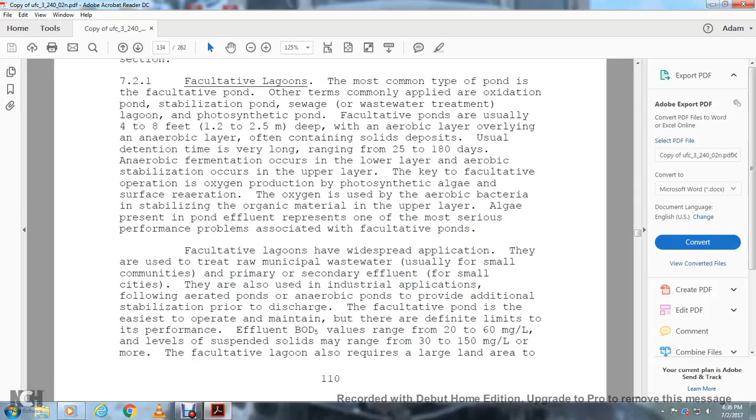Facultative lagoons require large land areas to maintain the BOD loading in a suitable range for this lagoon. Typical allowable organic loadings are generally much higher in summer than in winter, an advantage in areas where seasonal food processing wastes are received during the summer. Total containment ponds and controlled discharge ponds are forms of facultative lagoons. Total containment ponds are applicable in climates where evaporative loss exceeds rainfall. Controlled discharge ponds have long hydraulic detention times, with effluent discharged once or twice per year when effluent quality is satisfactory.

Alright, aerated lagoons. In an aerated lagoon, oxygen is supplied mainly through mechanical or diffused air aeration rather than through photosynthesis and surface reaeration. Many aerated ponds have evolved from overloaded facultative ponds that required aerator installation to increase the oxygenation capacity. Aerated lagoons are generally 6 to 20 feet deep with detention times of 7 to 20 days. The chief advantage of aerated ponds compared to facultative lagoons is that they require less land area. Aerated ponds are used in both municipal and industrial wastewater treatment applications.

For municipal waste, aerated ponds are restored when the facultative system becomes overloaded. Minimum land is available for expansion for industrial waste. They are sometimes used as a pre-treatment system before discharging to a municipal sewage system. Both municipal and industrial applications of aerated ponds may be followed by facultative ponds.

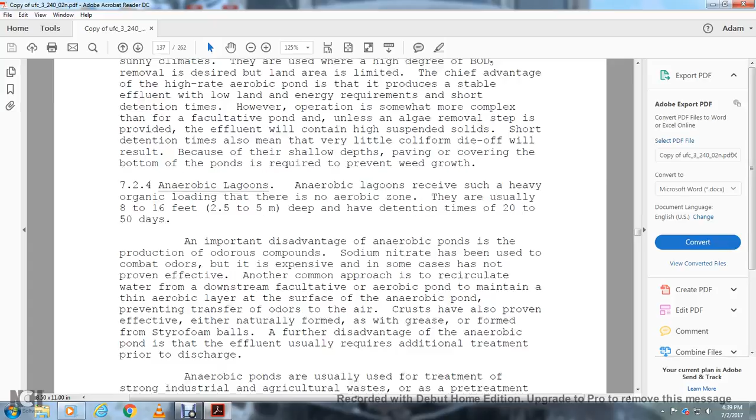7.2.4 Anaerobic lagoons. Anaerobic lagoons receive heavy organic loading, so there is no aerobic zone. They are usually 8 to 16 feet deep and have a detention time of 20 to 50 days. An important disadvantage of anaerobic ponds is the production of odorous compounds. Sodium nitrate has been used to combat odors, but it is expensive and in some cases has proven ineffective. Another common approach is recirculating water from a downstream facultative or aerobic pond to maintain an aerobic layer at the surface of the anaerobic pond.

Covers preventing transfer of odors to the air have also proven effective, whether naturally formed grease covers or styrofoam balls. A further disadvantage of the anaerobic pond is that its effluent usually requires additional treatment prior to discharge. Anaerobic ponds are usually used for treatment of strong industrial or agricultural waste, or as a pre-treatment step where an industry is a significant contributor to municipal waste, because they do not have wide application for treating municipal wastewaters. Anaerobic lagoons are not discussed further in this manual.

Section 7.3 Facultative lagoon design. Facultative lagoons shall be strongly considered for those installations that have no significant industrial wastewater component and that have available land area. This lagoon type is simple to operate, stable to flow and load variations, and has low capital and low operating costs.

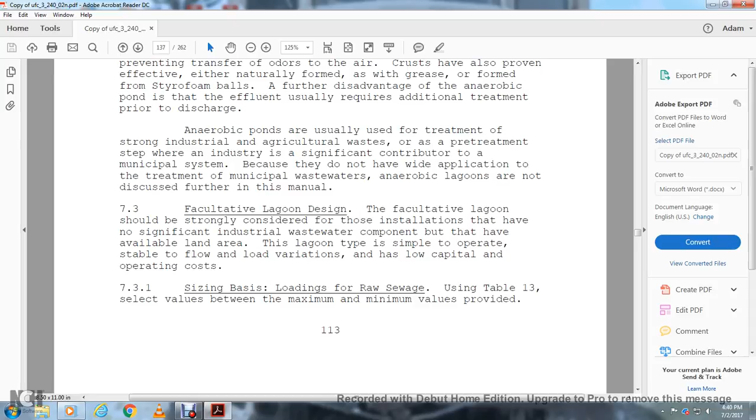7.3.1 Sizing based on loading of the raw sewage. Use Table 13 to select values between the maximum and minimum values provided, depending on the severity of freezing, ice cover, and available sunshine. Check the lagoon type for the detention time listed. Facility layout: with multiple ponds in series or parallel, limit the first stage pond to 40 pounds per day per acre, or kilograms per day per hectare, for odor control.

In areas where the average winter air temperature is 30 degrees Fahrenheit or less, and areas where the average winter air temperature is 50 degrees Fahrenheit or greater, per cell, a series of cells may be loaded as high as 90 pounds per day per acre. Portion the remainder of the total required area based on BOD loading equally among the remaining cells. Table 13, facultative lagoon sizing criteria.

Climate cold, extended ice cover: minimum 15 to 20 pounds BOD per day per acre, detention 150 to 180 days. Temperate: loading 20 pounds per day per acre, 50 pounds per day maximum, detention 40 to 150 days. Subtropical or tropical, no ice cover: 50 to 100 minimum BOD loading in pounds per day per acre, detention 10 to 40 days.

Depth: provide an operating depth of 6 feet, allowing the depth to vary between 3 and 8 feet for load variations and for insect and weed control. The ponds will also slowly accumulate solids over time. Convenient access should be provided so that equipment can dredge the pond. This normally is not required more frequently than every 10 years. For the design equation, refer to EPA 625-183-015 for a discussion of applicable rational design equations.

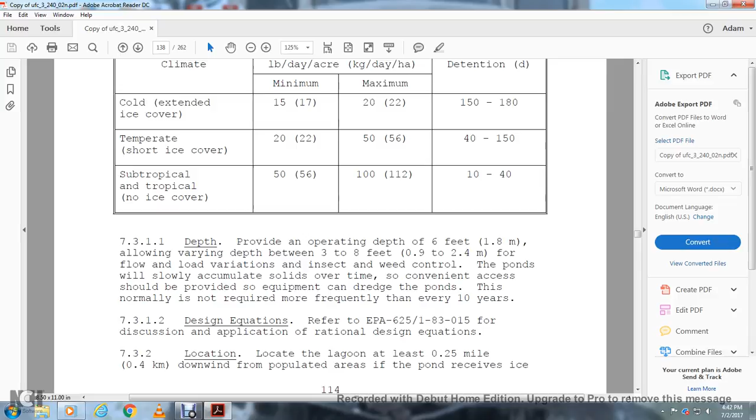Location: the lagoon should be at least a quarter mile downwind of populated areas. If the pond receives ice cover through the winter, a greater distance is recommended if possible. Exposure: choose a site providing maximum sun and wind exposure. Inlets and outlets: for circular and square lagoons, the inlet should be near the center. For rectangular lagoons, place the inlet one third of the distance from the influent end and locate the outlet so short circuiting is minimized. Provide an outlet capable of drawing off at multiple depths. Construction.

Provide levees with a minimum top width of 6 to 8 feet and interior and exterior slope ratios of 2 to 1 to 6 to 1. Provide a natural impervious soil liner, bentonite clay, which is required to minimize the exfiltration to groundwater. Using synthetic material lining will probably make the treatment process uneconomical. May be required by local regulations.

See Figure 22 for the details about facultative lagoons. Refer to paragraph 7.7 for the lagoon sealing requirements. 7.3.6 Layout. Use square, rectangular, or circular lagoons at small installations. Single lagoons are acceptable. Multiple lagoons at large installations are arranged for series or parallel operation. See Figure 23 for alternative lagoon flow schematics.

Recirculation can be used to increase the operational flexibility and treatment efficiency. Recirculation returns the active algae cells, increases oxygenation capacity, and dilutes the influent biochemical oxygen demand load. The recirculation ratio should be less than or equal to 2.

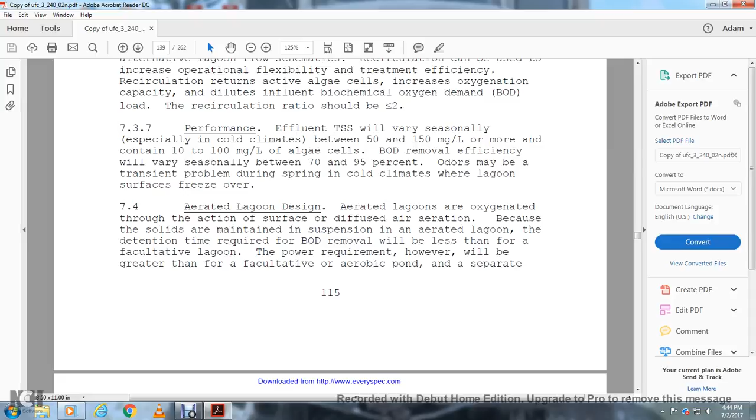7.4 Aerated lagoons. The aerated lagoon uses mechanical surface or diffused aeration, and the solids are maintained in suspension in the aerated lagoon. The detention time required for biochemical oxygen demand removal will be less than that of a facultative lagoon. The power requirement, however, will be greater than the facultative pond, and separate settling ponds after the aerated lagoon are usually provided to remove the suspended solids.

The aerated lagoon is operated as a complete mix, mechanically stirred, no recycle system. Compared with an activated sludge system, aerated lagoons may have a lower capital and operating cost and greater ease of operation. Therefore, aerated lagoons should be strongly considered for use at installations where adequate land area is available and discharge limits are not restrictive.

7.4.1 Size of basins. Number of equal size basins: provide at least 2 hydraulically separated aerated basins, and a third basin for solid-liquid separation. Aerated basins should be designed to operate with either a series or parallel flow pattern.

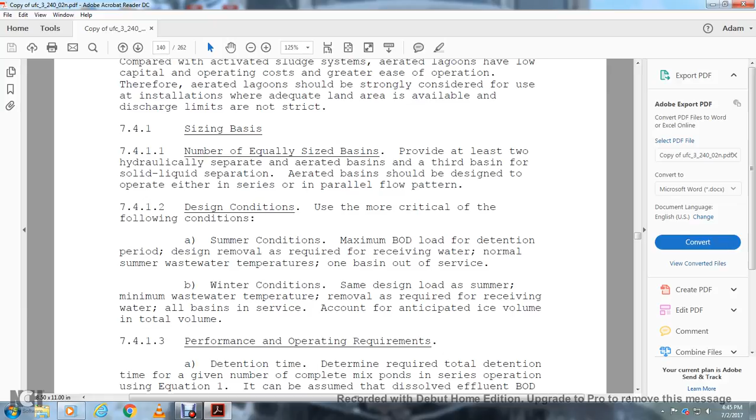7.4.1.2 Design conditions. Use the more critical of the following conditions. Summer conditions: design biochemical oxygen demand load and detention period, removal required for the receiving water, normal summer wastewater temperatures, one basin out of service. Winter conditions: same design load as the summer, minimum wastewater temperature, removal required for the receiving water, all basins in service, accounting for anticipated ice volume in the total volume.

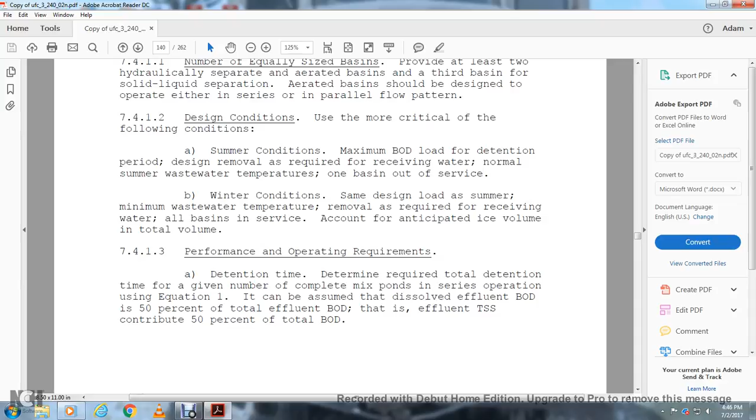Performance and operating requirements. Detention time. Detention required for the total detention time, given the number of complete mixed ponds in series operation, equation 1 can be used to determine the effluent dissolved biochemical oxygen demand, 50% of the total effluent biochemical oxygen demand, given that effluent TSS contributes 50% of the total biochemical oxygen demand.

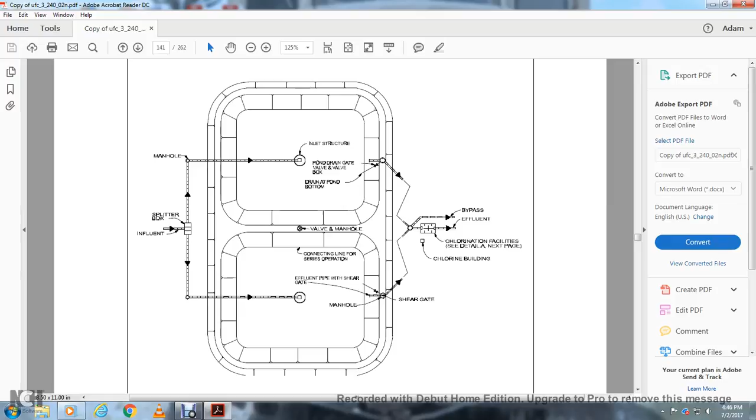Alright, facultative lagoon, mechanically aerated operation. A manhole. You have your valve of the manhole connecting line for parallel operation, influent splitter box manhole, inlet structure, valve of the manhole connecting line for series operation, drain at the pond bottom, bypass, effluent, chlorination facilities, chlorine building, shear gate, effluent pipe with a shear gate.

This is continued. You have the Parshall flume, effluent, chlorine contact tank, bypass shear gate, effluent shear gate, flush connection, lagoon drain, valve, manhole, normal lagoon outlet, inlet structure, inlet pond pipe, bottom of the pond, pipe support, minimum depth, outside diameter, maximum depth, outside area, influent, concrete splash block.

Typical section A, embankment, freeboard of 18 inches minimum, liquid depth 5 foot, minimum liquid depth 2 foot, embankment top width of 2.4 meters, seeding extending on the outside to 2 feet above the maximum waterline, embankment, max slope, and the fences.

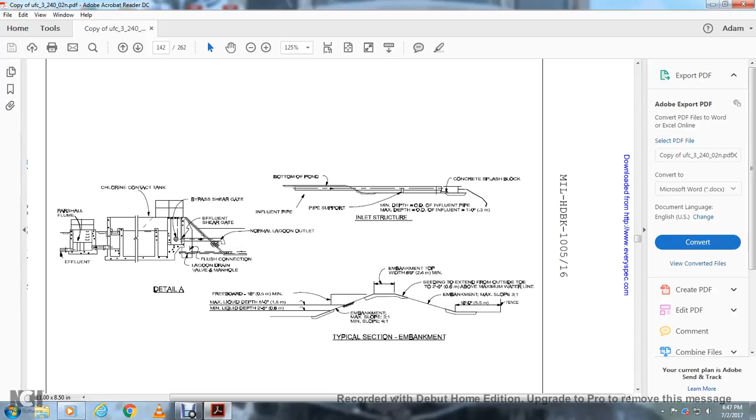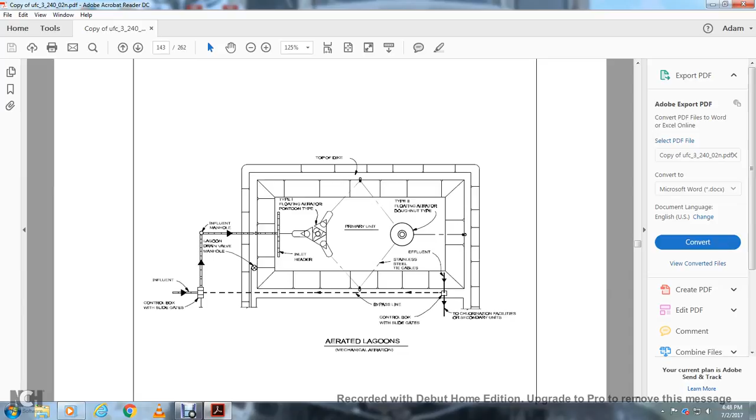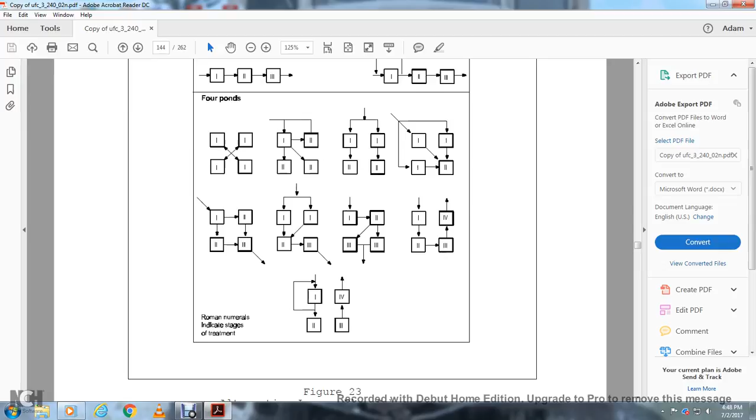Alright, aerated lagoons. Top of the dike, primary unit, type 1 floating aerator pontoon type, type 2 floating aerator donut type, effluent, inlet header, stainless steel cables, bypass, control box, slide gate, chlorination facility, secondary units, influent manhole, lagoon drain valve, manhole, inlet header, influent control slide gates. 2 ponds, 3 ponds, 4 ponds, alternative lagoon flow schematic.

Alright, equation: T, total hydraulic detention time divided equally among the number of aerated basins, is equal to N, the number of aerated basins operated in series, divided by KT, the first order reaction rate at the operating lagoon temperature, times the influent total biochemical oxygen demand in milligrams per liter divided by the effluent dissolved biochemical oxygen demand, to the 1 over nth,

minus 1. Alright, determine the rate constant with data for actual similar wastewater and operating conditions; if not practical, use a K of 2.5 per day for normal domestic wastewater at 20 degrees Celsius. Adjust K20 to the expected operational lagoon temperature using equations 2 and 3.

Increase the number of ponds in series to decrease the required total detention time. Lagoon temperature. Lagoon temperature is affected by the influent wastewater and ambient air temperature, basin geometry, and mixing condition. The equilibrium temperature can be approximated with equation 2.

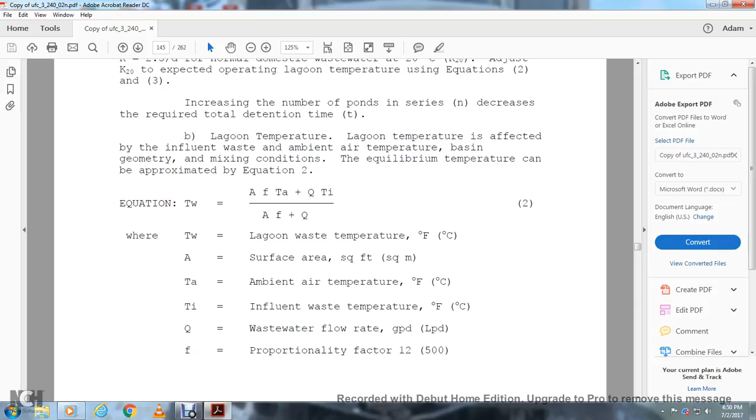Lagoon wastewater temperature is equal to the area of surface, square feet, times proportional factor 12 times ambient air temperature, plus the wastewater flow rate, gallons per day, times influent wastewater temperature, divided by area of surface, square feet, times proportional factor 12, plus wastewater flow rate, gallons per day.

For more details, refer to Industrial Wastewater Treatment in Aerated Lagoons, Advances in Water Quality Improvement, McKinney, Barnhart, 1968, and Process Design Techniques for Industrial Wastewater Treatment, Adams and Eckenfelder.

Temperature correction. Use equation 3 for the temperature correction of the rate constant. KT is equal to K20 times theta to the power of TL minus 20, where KT is the rate constant at TL, K20 is the rate constant at 20 degrees Celsius, theta is equal to 1.085 for aerated lagoons, and TL is the temperature of lagoon contents.

Oxygen requirement. The treatment of normal domestic sewage in aerated lagoons requires 1.3 pounds of oxygen per pound of BOD applied. Where aerated lagoons must meet low effluent biochemical oxygen demand requirements, consider using a perforated pipe grid air diffusion system. Air bubbles create certain current effects; this type of system minimizes short circuiting and maximizes effectiveness. Consult the supplier for performance data, and alternately consider multi-stage lagoons and effluent recycle.

Mixing requirement. No rational method is available to determine the proper power input, but it is necessary to keep solids in suspension. Consult with the equipment manufacturer to determine compliance with mixing for the vendor-supplied aerator. For a lagoon depth of 8 to 18 feet and suspended solids concentration of 1,000 to 5,000 milligrams per liter, provide 60 to 120 horsepower per million gallons of basin volume at depths greater than 12 feet. Draft tubes may be required for lesser depths, providing at least 30 horsepower per million gallons.

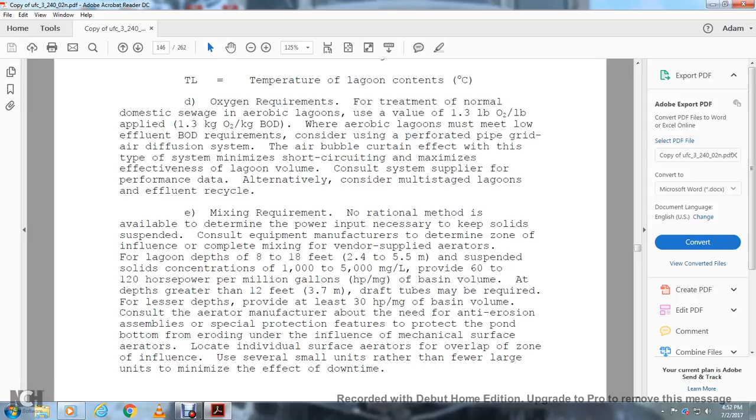Consult the aerator manufacturer about the need for an anti-erosion assembly or special protection features to protect the pond bottom from eroding under mechanical surface aerators. Locate individual surface aerators for overlap of the zones of influence, and use several small units rather than a few large units to minimize the effect of downtime.

Solids production and buildup. Estimate production based on settleable solids removed plus the biological solids yield from biochemical oxygen demand removal. For domestic sewage, use 1.2 pounds of suspended solids produced per pound of biochemical oxygen demand applied. Estimate the solids buildup in the final settling lagoon for storage and dredging period determination based on 50% destruction of volatile solids by aerobic decomposition and accumulated solids concentration of 10%. Provide a means of periodic removal unless the solids storage volume is adequate for the useful life of the lagoon.

Layout. See Figure 23 for alternative layouts with multiple lagoons in series and parallel operation. Construction. Prevent leakage in construction of aerated lagoons with embankments, synthetic liners, or natural soil layers. See Figure 22 for details of aerated lagoons and paragraph 7.7 for discussion of liner and sealing requirements. Dimensions. The following are minimum values: length to width ratio from 1 to 1 to 4 to 1, depth of 10 to 20 feet without mixing provisions, freeboard 3 feet.

7.4.5 Inlets and outlets. Locate the inlet at maximum distance from the outlet and discharge near an aeration device so diffusion will be rapid, and provide a submerged draw-off to avoid floating material in the effluent. 7.4.6 Protection. Provide scour pads beneath mechanical aerators to avoid any possibility of membrane liners being pulled into the aerator rotors. Provide splash pads at inlet discharge and riprap banks at the water surface.

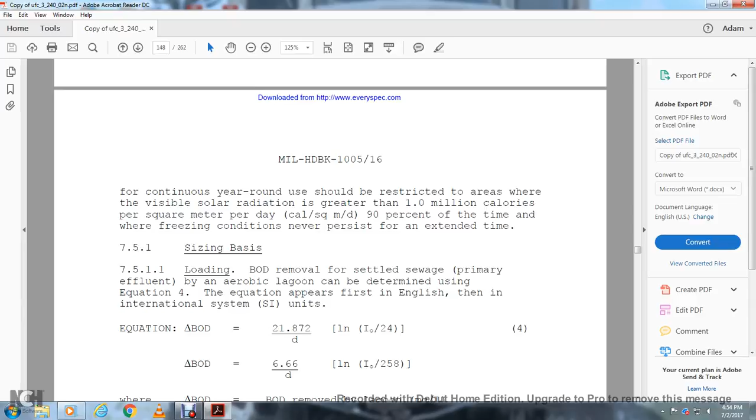Term 1 is determined with the method of Oswald and Gotaas, photosynthesis in sewage treatment, ASCE 1957. In the absence of solar radiation data, determine the total required lagoon volume based on the biochemical oxygen demand surface loading rate of 60 to 120 pounds per day per acre. Proportion the total required volume equally among multiple lagoons in series or parallel operations.

Depth. The operating depth should be 1 to 2 feet and should not exceed 3 feet to ensure light penetration for photosynthetic activity over the full depth of the lagoon. Applications: refer to Environmental Protection Agency 625-183-015 for further discussion on aerobic non-discharging lagoons and application of design equations.

Location, refer to paragraph 732. Exposure, refer to paragraph 733. Inlet and outlet, refer to paragraph 734. Construction, refer to paragraphs 735, 741, and 743. Layout. For multiple rectangular lagoons in series or parallel operation, the length to width ratio should be 2 to 1 to 3 to 1, and individual lagoons should be less than 10 acres to minimize short circuiting caused by wind action. Recirculation may be used to increase oxidation capacity.

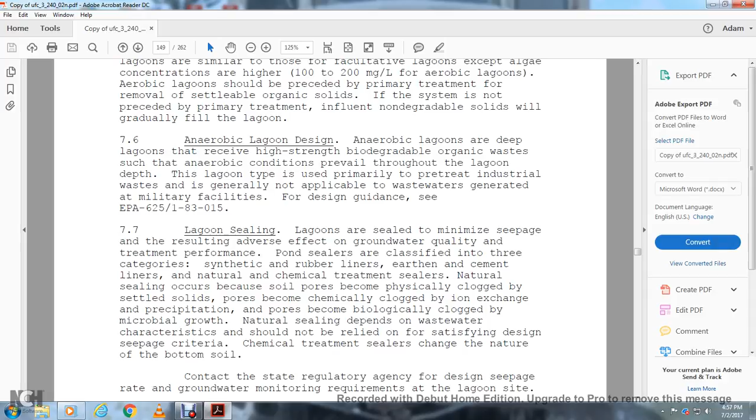Anaerobic lagoon design. Deep lagoons receive high-strength biodegradable organic waste such that anaerobic conditions prevail throughout the lagoon depth. This lagoon type primarily treats industrial waste and is generally not applicable to wastewater generated by military facilities. Design guidance: see EPA 625-183-015.

Alright, lagoon sealing. Lagoons are sealed to minimize seepage and resulting adverse effects on groundwater quality. Treatment performance. Pond sealers are classified into three categories: synthetic and rubber liners, earthen and cement liners, and natural and chemical treatment sealers. Natural sealing occurs because soil pores become physically clogged by settled solids, chemically clogged by ion exchange and precipitation, or biologically clogged by microbial growth. Natural sealing depends on the wastewater characteristics and should not be relied on to satisfy design seepage criteria.

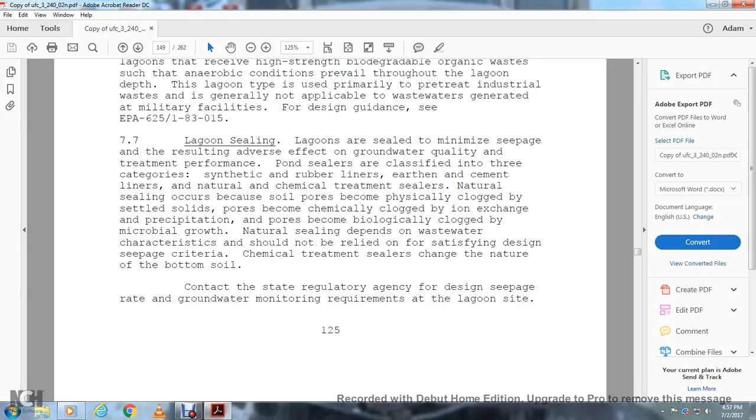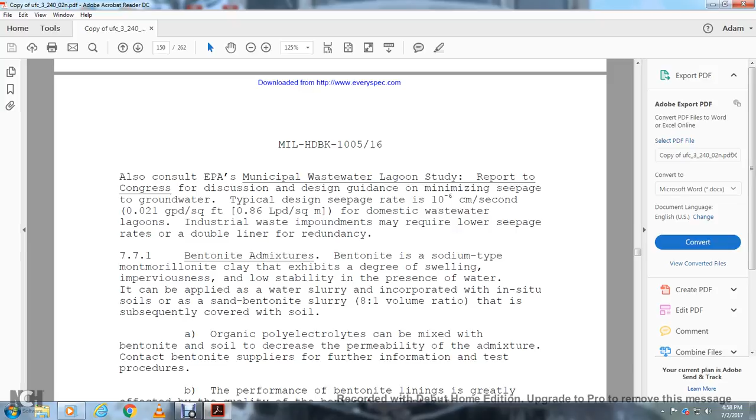Chemical treatment sealers change the nature of the bottom soil. Contact the state regulatory agencies for design seepage rates and groundwater monitoring requirements for the lagoon site. Also consult the Environmental Protection Agency Municipal Wastewater Lagoon Study reports containing design guidance for minimizing seepage to the groundwater. Typical design seepage rates are 10 to the -6 centimeters per second for domestic wastewater lagoons; industrial waste impoundments may require lower seepage rates, double liners and redundancy.

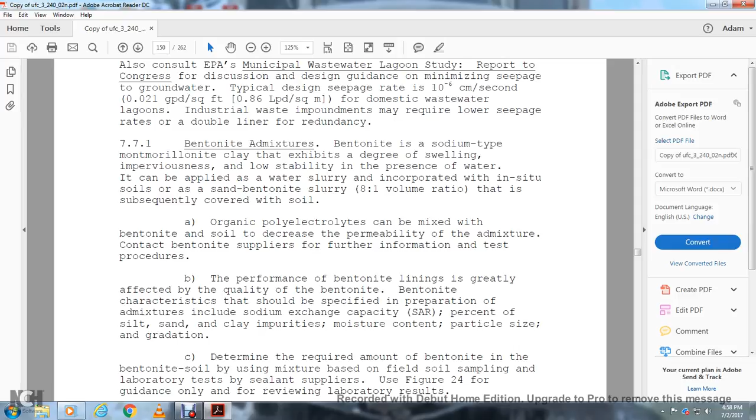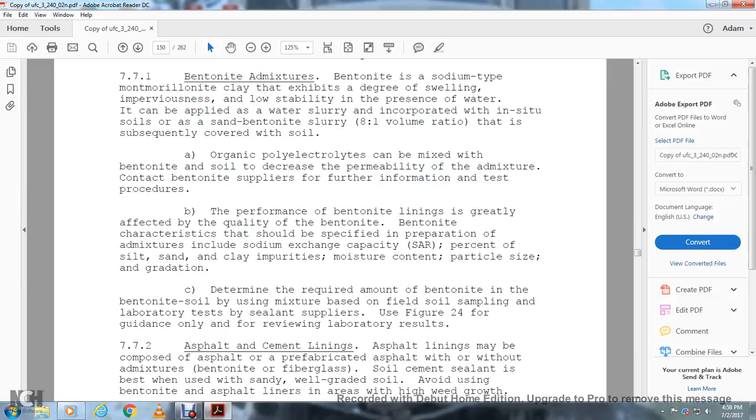B. The performance of bentonite linings is greatly affected by the quality of bentonite. Bentonite characteristics should be specified, including sodium exchange capacity, percent of silt, sand and clay impurities, moisture content, particle size, and gradation. Determine the required amount of bentonite in the bentonite soil mixture based on field sampling, laboratory tests by sealant suppliers, with Figure 24 as guidance only for reviewing laboratory results.

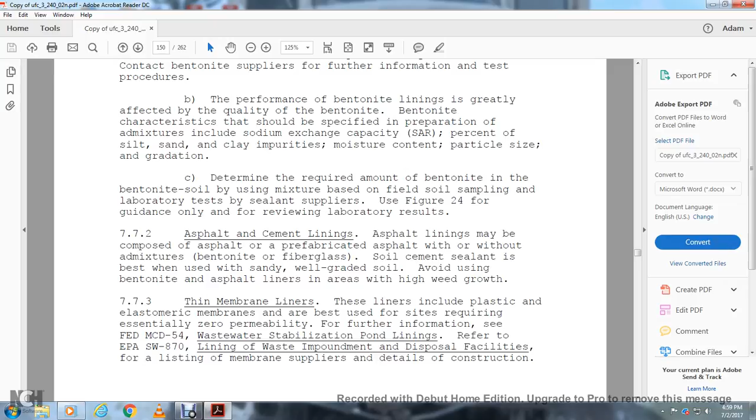772 Asphalt and cement linings. Asphalt linings may be composed of asphalt or prefabricated asphalt, with or without admixture of bentonite or fiberglass. Soil cement sealant is best when used with sandy, well-graded soil. Avoid using bentonite and asphalt liners in areas with high weed growth.

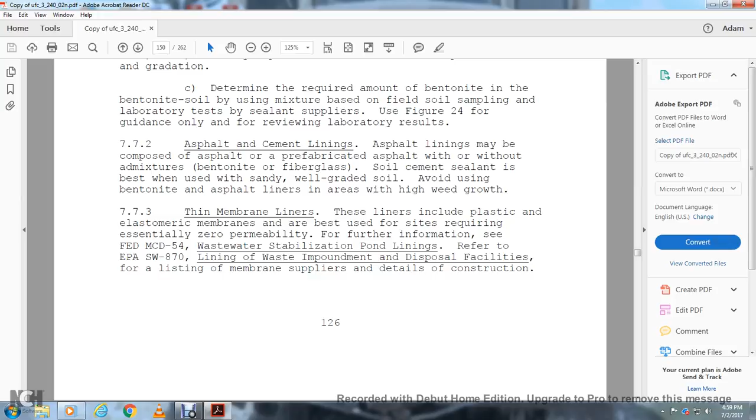773 Thin membrane liners. Alright, thin membrane liners. These liners include plastic and elastomeric membranes that are best used at sites requiring essentially zero permeability. Further information: FED MCD 54, wastewater stabilization pond linings. Refer to EPA SW 870, lining of waste impoundment and disposal facilities, for a listing of membrane suppliers and details of construction.

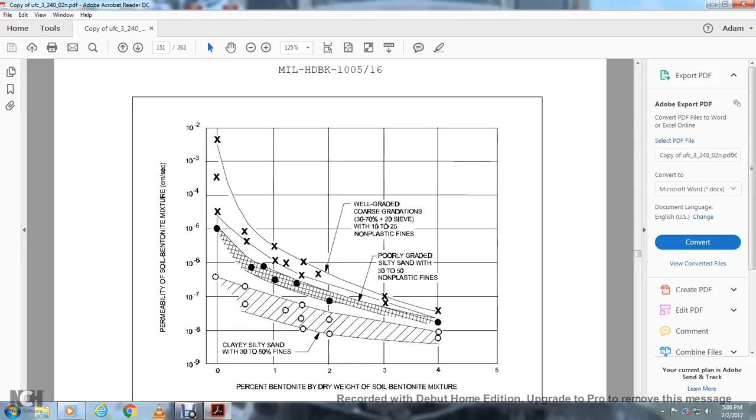Alright, Figure 24, relationship between permeability and quantity of bentonite for soil bentonite mixing. Permeability of the soil bentonite mixture versus percentage of bentonite by dry weight of the soil bentonite mixture. Well graded coarse gradations with 10 to 25% non-plastic fines. Poorly graded silty sand with 30 to 50% non-plastic fines. Clayey silty sand with 30 to 50% fines. Section 8, chemical storage and handling considerations.